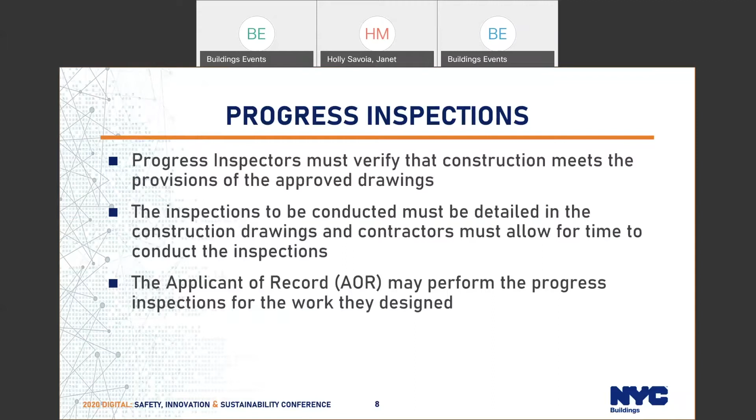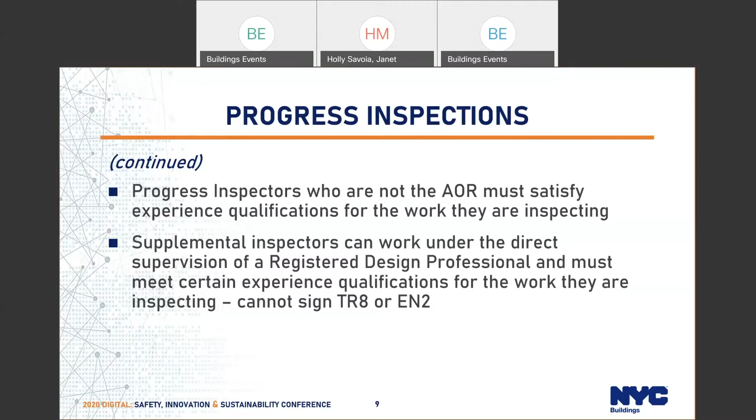Progress inspectors who are not the applicant of record must satisfy experience qualifications for the work they are inspecting. Supplemental inspectors can work under the direct supervision of a registered design professional and must meet certain experience qualifications for the work they are inspecting. However, they cannot sign the TR8 or EN2.

So what are the TR8 and EN2? These are the required documents for construction sign-off. The TR8 is a form referred to as the Technical Report Statement of Responsibility for Energy Code Progress Inspections. The Progress Inspector must certify that all progress inspections noted on the original TR8 and on TR8s filed with any post-approval amendments have been satisfied. The Progress Inspector must sign and seal the TR8, certifying that inspected work complies with the approved drawings.

The other required document for construction sign-off is the EN2 form, otherwise known as the Certification of Conformance with As-Built Energy Analysis. Here, the Progress Inspector must certify on this form that the as-built values for energy in the building match the values in the latest approved energy analysis. If they do not, then an as-built energy analysis must be prepared by the applicant of record, and the Progress Inspector must certify on the EN2 form that the as-built values for energy in the building match the values in the as-built energy analysis. The as-built energy analysis must be professionally certified and submitted with the EN2 form at sign-off.

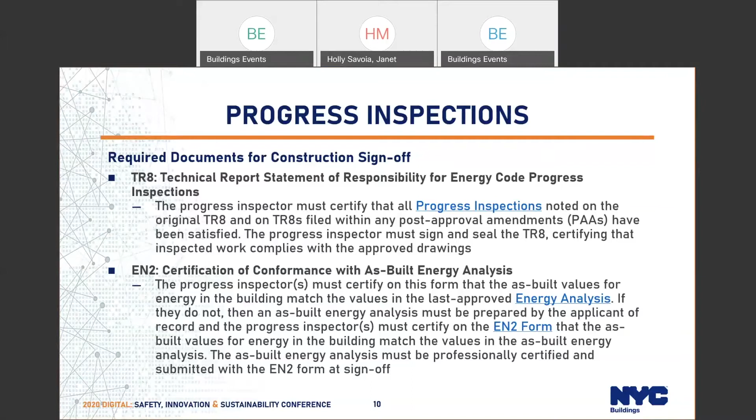Let's look at Rule 5000-01. The Energy Code Compliance Rule establishes the department standards for progress inspections during construction. Table 1 and Table 2 are progress inspections for energy code compliance for residential and commercial buildings.

What you see here is the table headings. On the left, the inspection/test gives a general description of the inspection. But we would like you to look towards the right at the standard and code sections for more detailed information about what is to be included.

Another rule, 101-07, is the approved agencies rule, and that describes the qualifications for progress inspectors for energy code compliance in subdivision C, paragraph 3.

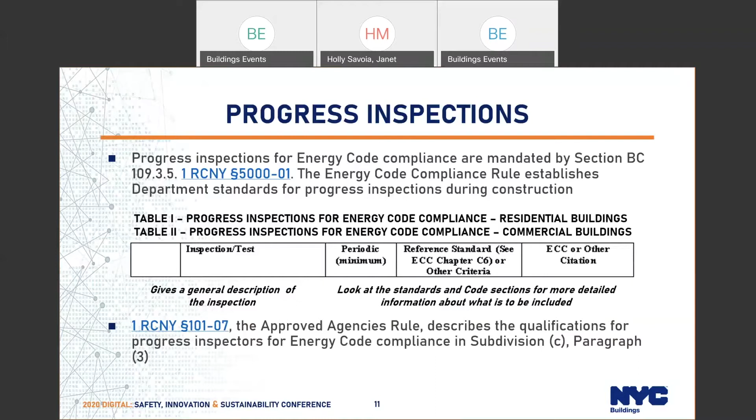There is a requirement for progress inspections. Owners are required to retain registered design professionals to perform progress inspections. Such professionals must not have a conflict of interest for the project they are inspecting, and they must verify that the construction as it progresses conforms to the approved construction drawings.

When related special inspections are required to be completed before progress inspections are performed, the progress inspector must not perform the progress inspections until they are completed.

When construction that must be inspected differs from the approved drawings, such that the progress inspection cannot be adequately performed, the progress inspector must wait until the drawings and energy analysis are updated and approved as appropriate before commencing the inspections.

Unless otherwise noted in Tables 1 or 2 in Rule 5000-01, the progress inspectors must inspect at least 15% of the construction work for a given progress inspection, and at least one of each unit type.

Phased project inspections are permitted under certain circumstances, specifically when it refers to seasonally conducted inspections.

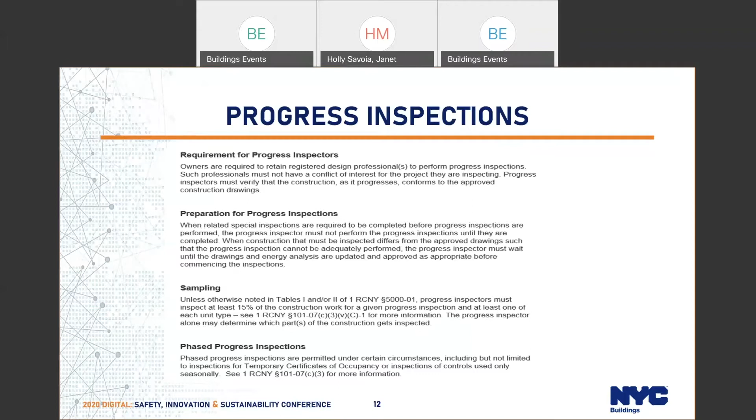I want to draw your attention to some of the links on our website that you may find helpful. What you see here is a progress inspections comparison chart between two codes. The one you see here is the difference between the progress inspections required in the 2016 code versus the 2020 code. We also have one of comparison between the 2011 and 2014 code. You may find those very helpful when you have projects that may have been approved under a previous code.

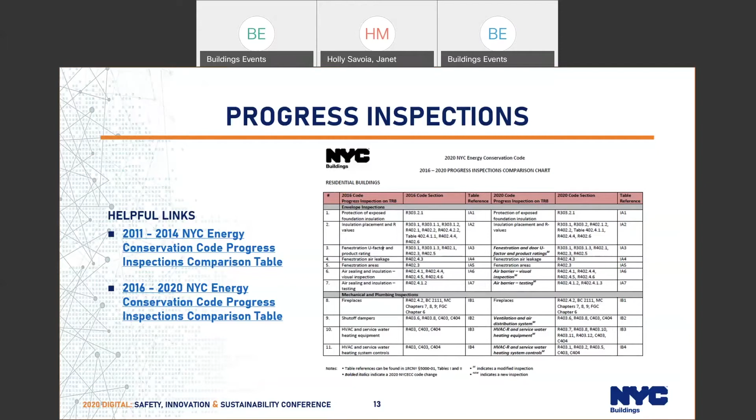So what if there is a conflict between Table 1 and 2 and the TR8 Statement of Responsibility? What if you, the inspector, believe that an inspection is missing? What you should do, since you work for the owner, is to notify the owner and the applicant of record of the inconsistency and request that it be corrected.

But in the end, the EN2 references the approved energy analysis. So Table 1 and 2 on the approved EN page is the approved inspection list.

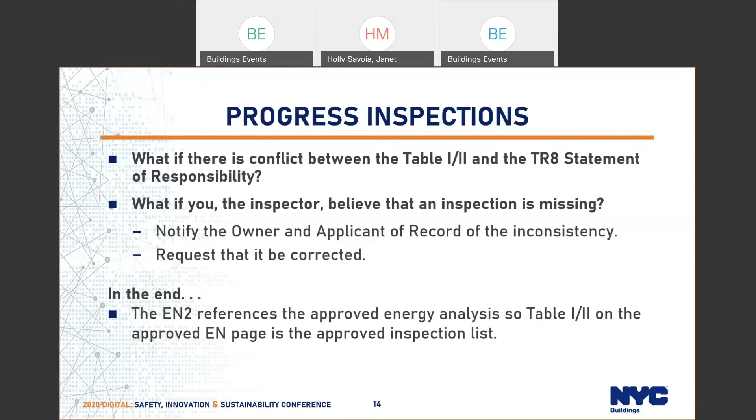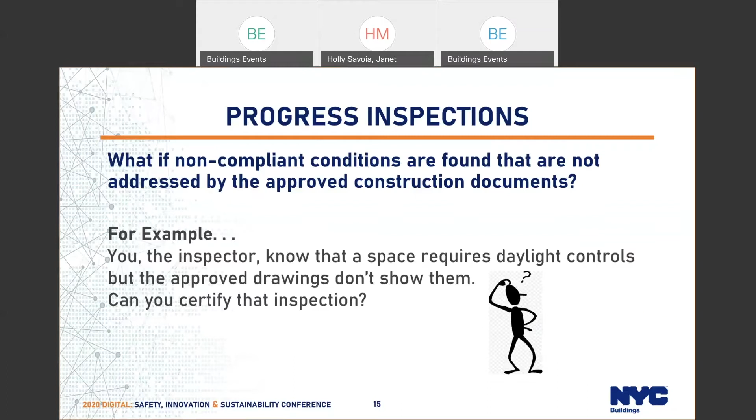What if non-compliant conditions are found that are not addressed by the approved construction documents? For example, you, the inspector, know that a space requires daylight controls, but the approved drawings do not show them. Can you certify that inspection?

Again, notify the owner and the applicant of record of the non-compliant condition. Request amended drawings and that the non-compliant condition be corrected. Then recommend that you re-inspect.

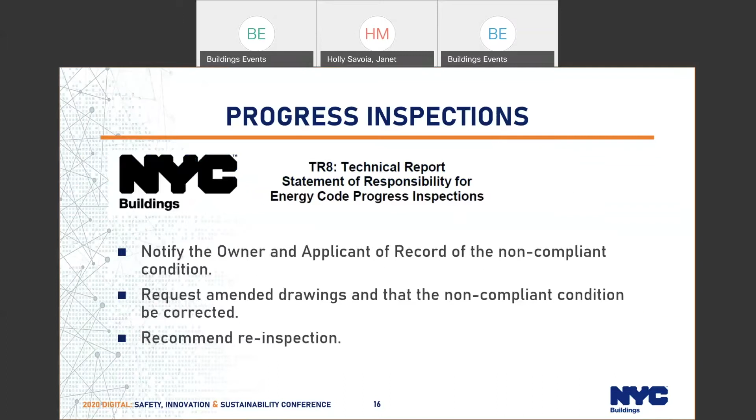What you see here is the bottom portion of the TR8 form. And what it says is that you have completed the items specified herein and that you are certifying the following: either that all work performed substantially conforms to approved construction documents, or that all work performed substantially conforms to approved construction documents except as indicated in the attached report.

So here is the point where you can highlight that there are items that do not conform to the approved construction documents, or if you wish to, you can point out any omissions. This is where you would do that.

On the EN2 form, however, it's a different story. The EN2 states that the as-built conditions do conform to the approved documents, and there are only 3 ways you can do that. The choice is that the as-built conditions conform to the originally approved energy analysis, or that they conform to the latest post-approval amendment, or that you are attaching a revised energy analysis. But what you are saying when you sign this form is that the EN2 states that as-built conditions conform to the approved documents.

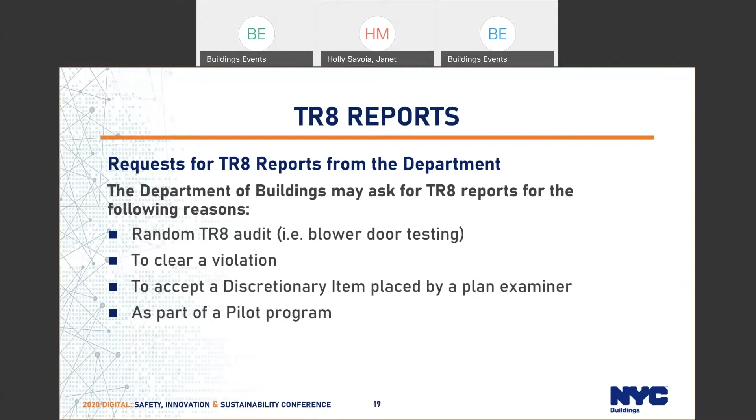So, you've been audited. What happens now? What can you do to make the process go smoothly and efficiently? What documentation does an auditor need in order to verify that your report is accurate and complete? And what can DOB do to help?

Take a look at the updated Rule 101-07. There's new information there about what's required, but it's general information. Please keep in mind that when working with an auditor, it's just not possible to include everything that a plan examiner or zoning examiner might need in order to approve plans. So therefore, it's not possible to include in a rule absolutely everything that an energy auditor might need in order to verify your reports.

So the more information you provide, the better able your auditor is to understand and approve your reports. That's the bottom line here. There are also some good references on the Energy Code website. Please check there and check frequently because we'll be updating.

So what will the sustainability enforcement auditors look for? The job of the TR8 auditor is to verify your reports for accuracy and completeness. In order for us to do that, you, the inspector, need to both show and tell. What that means is, don't just tell us it's compliant, show us that it's compliant. Show us how it's compliant.

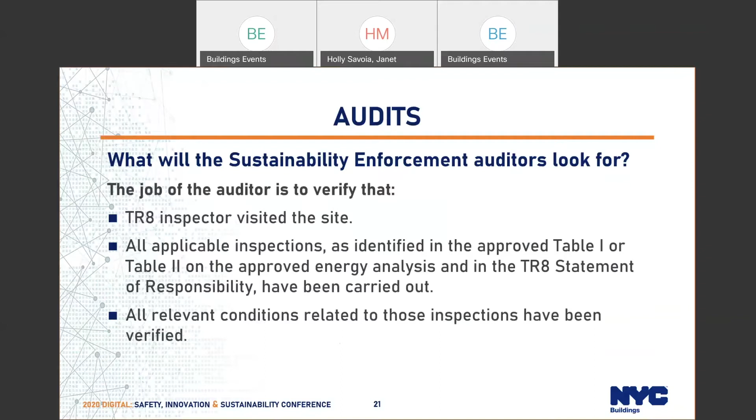If deficiencies in the work are identified, you can recommend remedial action. Look to your owner for guidance on that. How much do they want you to do?

If conditions are found that don't correspond to the approved drawings, either the energy analysis should be amended so as to verify that conditions are still compliant, or the conditions need to be amended to conform with the approved energy analysis. So which will it be? Or are they going to do nothing? That is what you will be putting on your report.

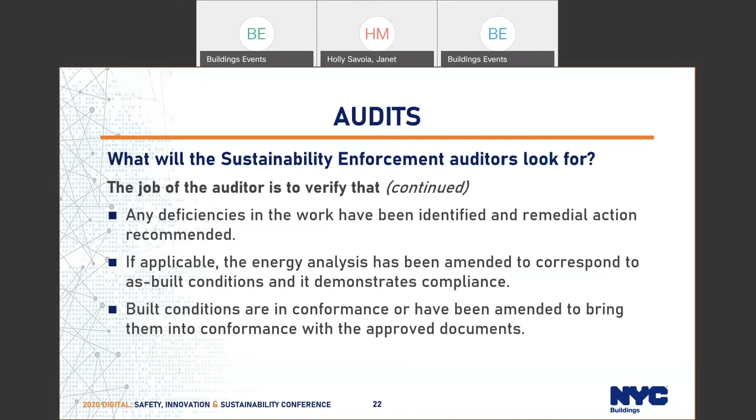What will help your auditor verify that your report is complete and valid? In order for your auditor to verify your report, here's the show part.

What building are we looking at? Can we tell from your photos? Please show enough context so the building can be recognized. How can we verify that the photo was taken at the time of inspection? If it's date stamped, we can tell when in the construction process the photo was taken.

Show us that the conditions are compliant. What are we looking at? What does it mean? And this photo here, is that a compliant condition? Would you submit that photo to show us that all is well with that installation? I suspect that your auditor might disagree.

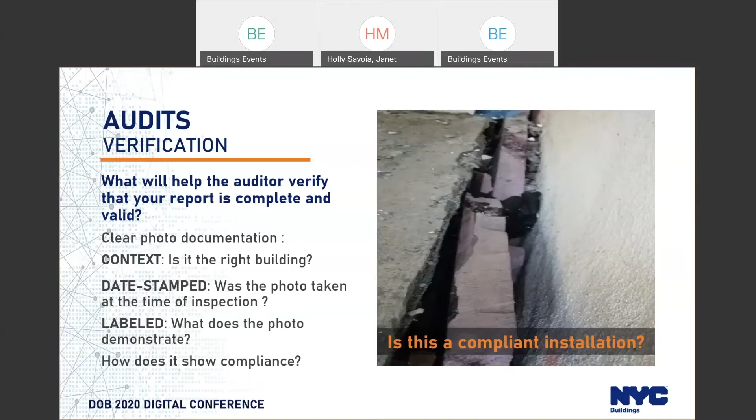Based on those approved drawings, did you look at everything that should be inspected? Were you comparing conditions to the most recent approved drawings? And are your photos date stamped?

Is everything clearly documented by photos? Can we tell what we're looking at? Can we tell that the condition is indeed compliant? Do you explain how you determined that the conditions complied? Just saying okay or complies is not sufficient. Your auditor's not going to accept that.

And did you find any deficiencies? Did you recommend remedial actions? Did they follow up on your recommendations to either amend conditions or amend drawings? Please document whether they did or did not. If they did, please explain what was changed.

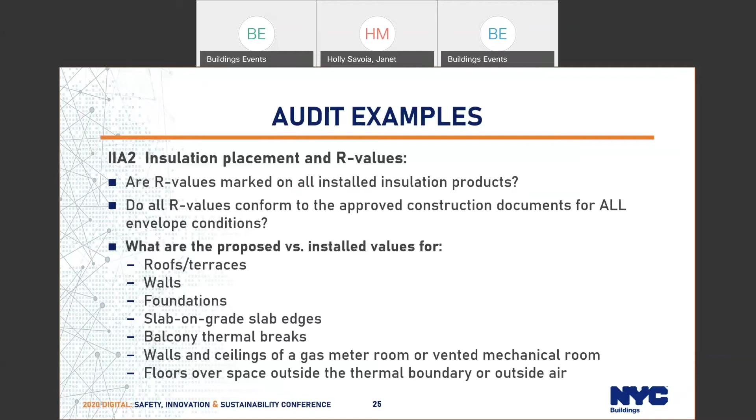For instance, the ERV Recovery Effectiveness Rating should be on the approved mechanical schedule, but you probably won't find it listed on the equipment label on site. You might have to look up the product model to get that information.

And how did you verify that the maximum pipe length from the source of heated water to the fixture does not exceed the maximum length identified on the approved drawings? What was that length? The source of heated water can be the hot water heater, the building risers, the circulating water system, or a heat trace system. What did you do? What were you supposed to find? And what did you find?

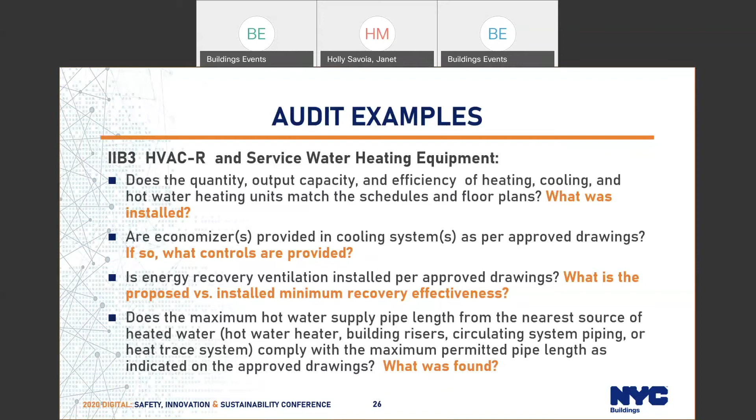Lighting: if 100% of the lamps in a dwelling unit are high efficacy, there's no need to count them. But if there's a mixture of incandescent and high efficacy, you do need to give the percent. And you do need to count them if it's not a dwelling unit.

What lamps are found? Can you tell by looking at the difference between a halogen lamp and an LED? They sometimes look alike. Halogen is generally not high efficacy. They're more efficient these days, but they're probably not high efficacy. If you're not sure, check the lumens per watt for that particular lamp.

It's probably not going to be found on a label, and you may not want to climb up into the ceiling to pull down the lamp. You may have to do some research online, and you may have to get information from the contractor as to what was purchased. Do the fixture and lamp types match the energy analysis?

What about lighting controls? Check the control schedule for what's required and the controls narrative for what the required functions are. They go together. Lighting control functionality needs to be verified by TR8 inspection. Do they have all the functions required by the Energy Code? How did you verify that? And if you believe that required controls are missing from the drawings, include that in your report along with remedial recommendations.

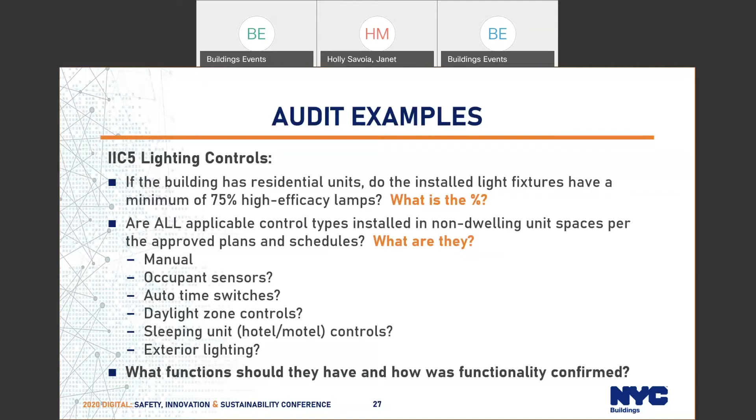What else will help the auditor verify that your report is complete and valid? If you come across conditions that cannot be verified in the field, it may require some digging. Mineral wool, for instance, probably doesn't have an R value label. Is there packaging lying around on site that shows what the R value per inch is? If not, how else can you find out? Are you going to take the contractor's word for it?

Or you could ask for an invoice, then check the product literature against the invoice data. How many inches were installed? Did you measure it? The same problem may arise if they've scraped the stickers off the windows and doors already. You could ask for an invoice or some other proof of what was purchased, and then assume that what was purchased was actually installed. Then you can compare that information to the NFRC 100 test results for that fenestration.

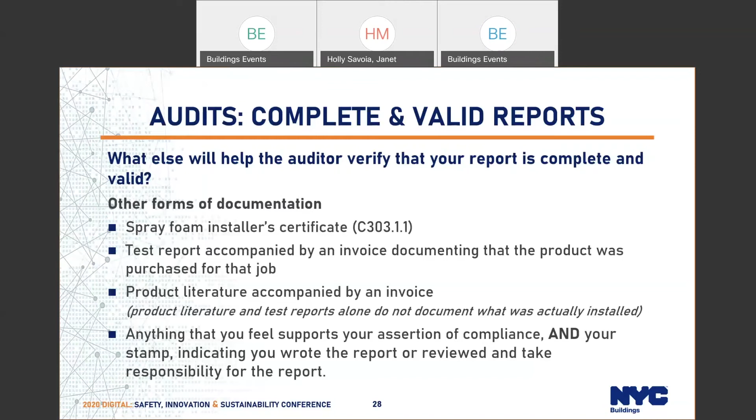The Energy Code calls for insulation that is blown or sprayed to have an installer's certificate on site. Ask for it. It's supposed to be posted there. And also, please stamp your reports. Unfortunately, we do sometimes need to verify that the report actually did come from you.

Blower door testing. Prevention of air leakage is a very important component in energy conservation. According to the U.S. Department of Energy, up to 40% of energy costs required to heat and cool buildings is due to air leakage. DOB is now auditing blower door tests, and we sometimes ask to attend the testing, especially on big buildings because they're more complicated to test. Table 1 and Table 2 show the testing standards.

ASTM E779 is basically for houses, but it can be used for larger buildings if accommodations are made. But ASTM E3158 gives much better guidance for large building tests. Please read them. They're important, and we'll talk more about them in a little bit.

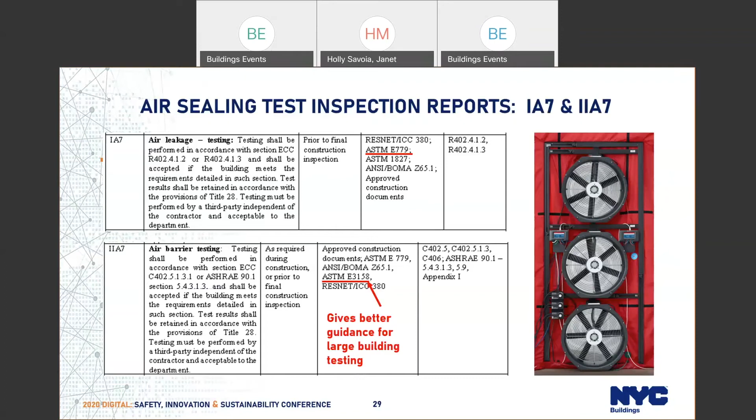The biggest problem area in testing seems to be in calculating the enclosure area. That's the total area of the walls, the floor, and the ceiling surrounding the test area. In the residential code, they might use the volume of the test area instead of the enclosure area. But the important thing to remember is that the boundary of the test area is not necessarily the same as the thermal boundary.

It's a question of where they put the air barriers and where they sealed. The designer should be able to tell you this, and it will make the testing process go much more smoothly if you verify it in advance. It's not always easy to tell on site. In this diagram, for instance, they sealed the interior walls and ceiling of those spaces that are drawn in white on the diagram, not the exterior walls. If everything's buttoned up already, you probably won't be able to tell.

And don't forget that gas meter room or the vented mechanical room. It's going to be outside the sealed boundary, so outside the enclosure area.

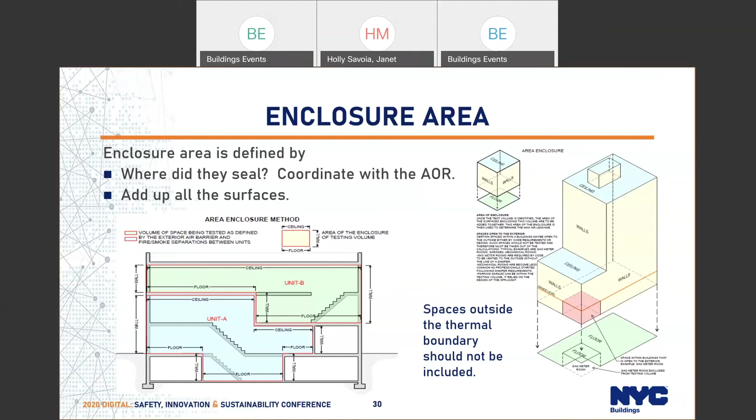If your air sealing report is being audited, we'll help you. Send the auditor your enclosure area or volume diagrams and the calculations, and he or she will help you verify them. We can't do this for everyone, but if your job is being audited, we will help you. Your job will then be to verify that the testing contractor enters the correct values into the manometer or the software.

These photos show a manometer. In a large building, they will typically have a computer with software, and you'll be looking at a computer screen instead.

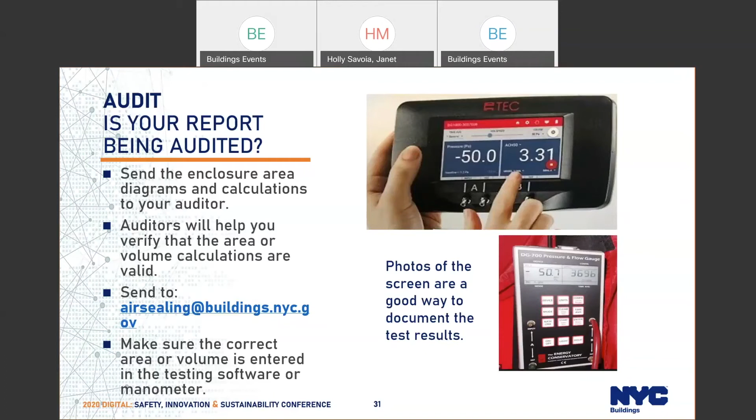Testing of large buildings is complicated. Wind and stack effect are significant factors, as is the size of the building and the need to maintain relatively consistent pressures throughout the whole test area for the duration of the test.

ASTM E779, as was mentioned before, was originally written for houses. And when people began testing larger buildings, problems were encountered. The U.S. Army Corps of Engineers air leakage test protocol was developed to address those problems, and it describes some workarounds for the difficulties that commonly arise in large buildings. It's free, you can get it online. I highly recommend it. It has some nice fill-in-the-blank forms, too, that you can use.

Then ASTM E3158 was written just for large buildings. It addresses those problems and incorporates some of the Army Corps recommendations. It has a table, Table 1, that lists setup procedures. Look at the middle column of that table. It says building envelope mechanical systems excluded. The mechanical systems are not part of the test. That table is where you'll find the preparations for testing a large building. They're not the same as the procedures described in the Residential Energy Code.

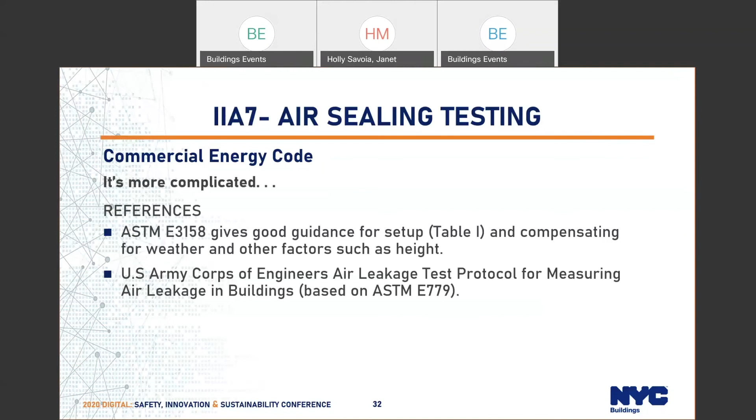And coming soon, the air leakage and testing verification webinar. We've been working with a consultant to develop a webinar for TR8 inspectors that goes into more detail about air sealing tests. It's for inspectors, not for testing contractors. They have their own training, and if you're interested, you can go to the websites of blower door manufacturers to find their training manuals. But this webinar is just about what you, the inspector, should be on the lookout for when you observe and certify a large building test.

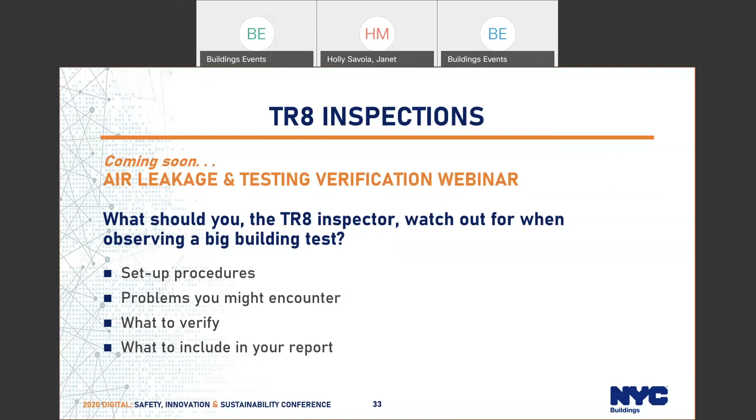It talks about setup procedures, problems you might encounter, what to verify, what's most important, and what to include in your report. These are recommendations, not requirements, but they're important recommendations. We hope to have this webinar posted on the Energy Code website soon, along with some excellent references that are already there. We also hope to have some more TR8 related references available, so keep checking back.

We're working on guidelines that accompany the webinar. They'll essentially be Cliff Notes versions of ASTM E3158. That standard is a must read, but it's not an easy read, so we're hoping to make a user-friendly summary of it. It will also incorporate some recommendations that came from our consultants, but again, just suggestions, not requirements.

The Air Barrier Continuity Plan. Some of you may have received audit notices about the ABC plan. We're currently conducting a pilot program to see what ABC plans are out there and if there is need for more guidance for both the design applicants and for TR8 inspectors. The ABC plan is not just a bunch of details. It's a plan to test or inspect each type of unique air barrier, joint, or seam in the building envelope for continuity and defects. That's the quote from the Energy Code.

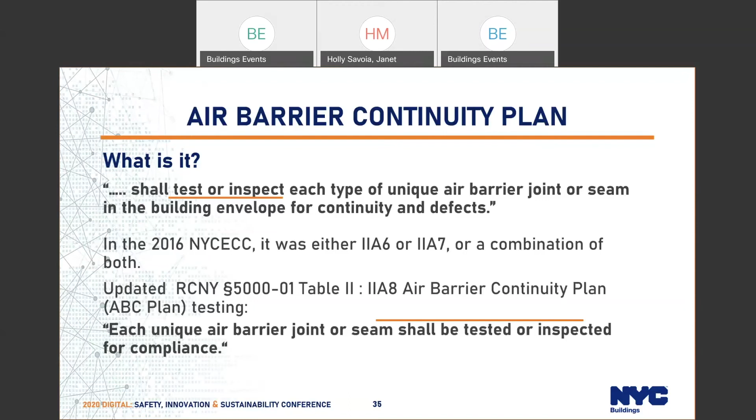So the ABC plan is a set of instructions to you, the inspector, from the applicant, from the designer. How many of the areas identified on the drawings are to be tested rather than inspected? How are they to be tested, in the lab or in the field? By whom are they to be tested, by you or by a consultant?

What are you expected to look for when you do your visual inspection? How many instances of that condition should you be verifying, and what degree of imperfection is acceptable? Are you expected to test for adhesion? Are fish mouths on seams okay? How did you verify that they used the right sealants, and did they apply it correctly?

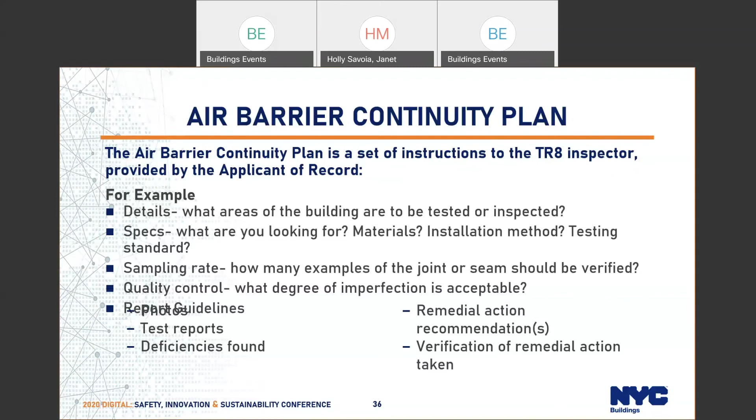How detailed a report do they want from you? Do they want you to recommend remedial actions or just report on it? Do they want you to verify if it was fixed? All this information should go into an ABC plan for you to follow. If you don't feel that you have been given enough information, ask the design applicant for more.

For your TR8 report, DOB will be looking for what was proposed versus what was found. How did you verify the quality of the installation? Where did you look, what were you supposed to find, and what did you find?

And what if an envelope commissioning contractor has been hired? What is your role then? Well, it's pretty much the same as when you verify a blower door test. Did they do what they're supposed to do? Did they do what's described in the ABC plan? They'll probably do much more than that in an envelope commissioning job, but what aspects of that process relate to the inspection of joints and seams in the air barrier for continuity and defects? You'll be reporting on their process and summarizing their results as they relate to the ABC plan.